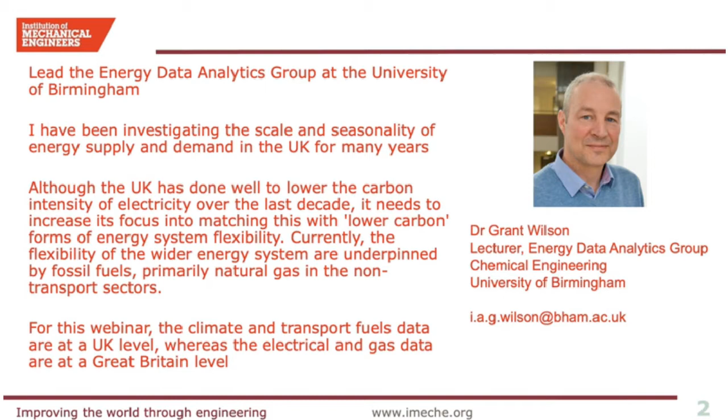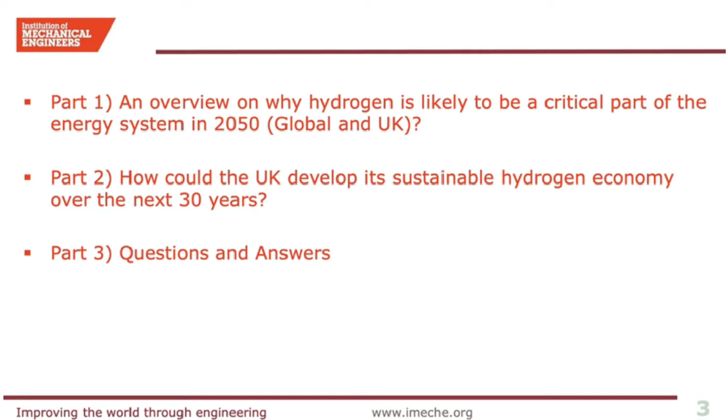There is quite a bit to get through in 40 minutes, so the webinar is split into 3 parts. Part 1 is an overview on why hydrogen is likely to be a critical part of the energy system in 2050 at a global and a UK level. Part 2 is how could the UK develop its sustainable hydrogen economy over the next 30 years. And Part 3, delighted to answer any questions.

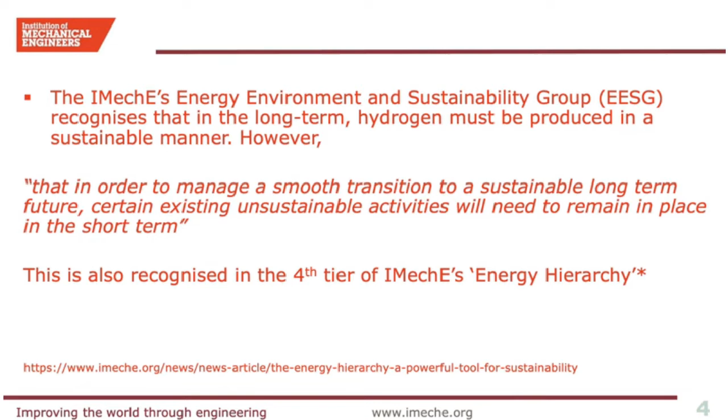It is important to state upfront and clearly that in the view of the Institution of Mechanical Engineers Energy, Environment and Sustainability Group, in the long term, hydrogen must be produced in a sustainable manner. However, the group also recognises that in order to manage a smooth transition to a sustainable long-term future, certain existing unsustainable activities will need to remain in place in the short term. This is also part of the Institution of Mechanical Engineers' energy hierarchy.

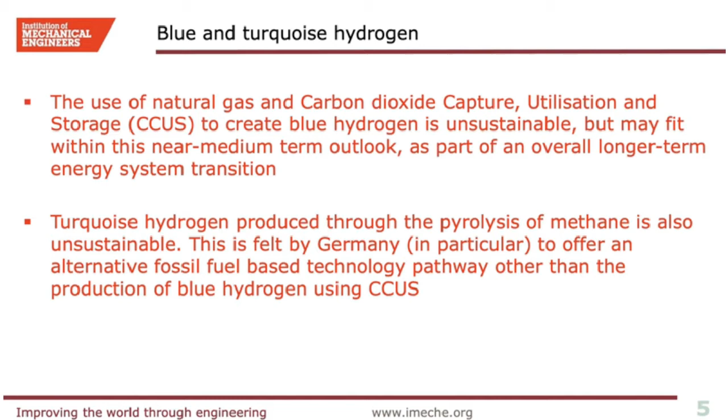The use of natural gas and carbon dioxide capture, utilisation and storage, or CCUS, to create blue hydrogen is unsustainable, but it may fit within this near to medium term outlook as part of an overall longer term energy system transition. Turquoise hydrogen, produced through the pyrolysis of methane, is also unsustainable. It is felt by Germany in particular to offer an alternative fossil fuel based technology pathway other than the production of blue hydrogen using CCUS. However, the production of hydrogen from fossil fuels needs to be replaced as soon as is practical with hydrogen produced from sustainable sources.

Ultimately, hydrogen has to be created from a range of non-fossil, low-carbon sources, such as primary electricity from renewable generation or from bio-based feedstocks. In terms of the cost differential between fossil-produced and sustainably produced hydrogen, governments will continue to have a range of options to encourage a shift from one to the other.

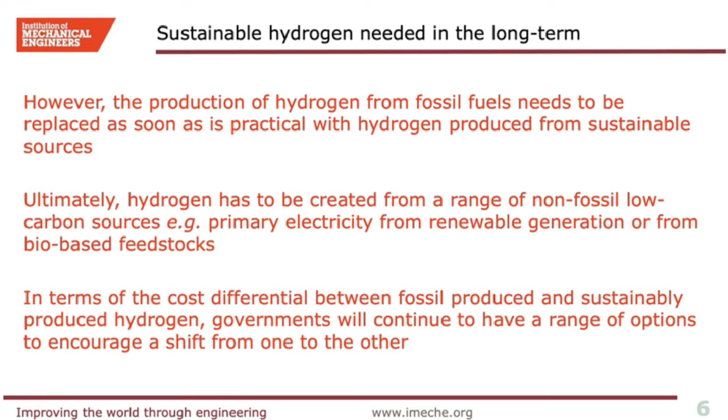Hydrogen is increasingly seen as a critical component of future energy systems. Indeed, in current energy systems, it is already a critical component as a part of fossil hydrocarbons. There's a growing body of evidence suggesting that sustainable hydrogen is likely to be a critical core component of net zero greenhouse gas economies, such as the recent reports and announcements from the European Commission stating that the end goal for the EU is clear: climate neutral energy system integration with renewable hydrogen and renewable electricity at its core.

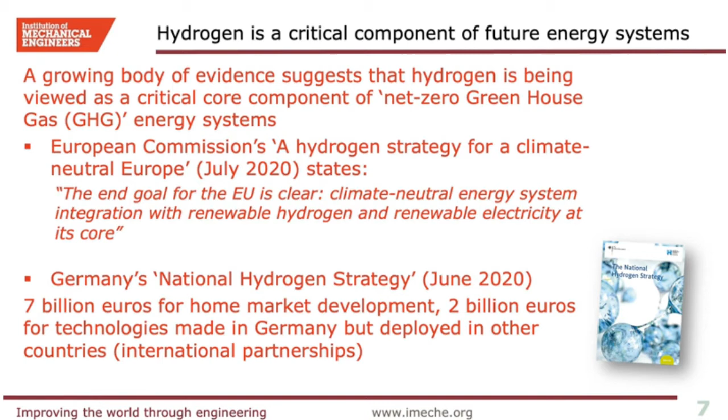This announcement was preceded by Germany's national hydrogen strategy, which announced multi-billion euro support to develop a home market and international market for the development of hydrogen. In the UK, the importance of hydrogen to its net zero ambition is evidenced within the Committee on Climate Change's recent progress report to Parliament, where it is stated that low-carbon hydrogen is critical to achieving net zero and needs to be deployed at scale during the 2020s.

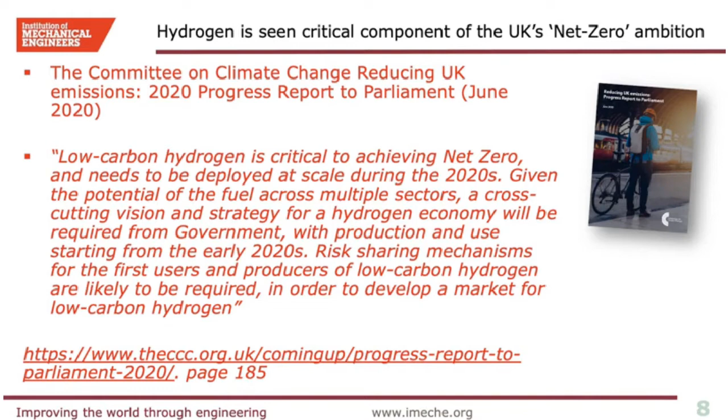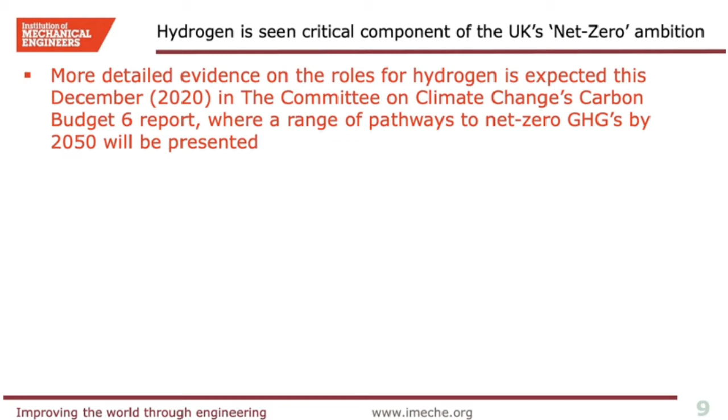Given the potential of the fuel across multiple sectors, a cross-cutting vision and strategy for a hydrogen economy will be required from government, with production and use starting from the early 2020s. Risk-sharing mechanisms for the first users and producers of low-carbon hydrogen are likely to be required in order to develop a market for low-carbon hydrogen. More detailed evidence on the roles for hydrogen is expected this December in the Committee on Climate Change's Carbon Budget 6 report, where a range of pathways to net zero greenhouse gases by 2050 will be presented.

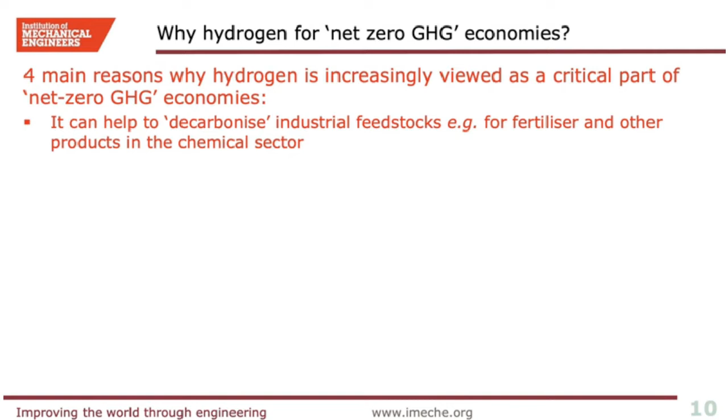So what are the reasons underpinning the growing interest in hydrogen? Why is it being viewed as a critical component of net zero greenhouse gas economies? Firstly, it can help to decarbonise industrial feedstocks, such as for fertiliser and other products in the chemical sector. Secondly, it can provide high temperature process heat, can form the basis of synthetic liquid fuels, and act as a reducing agent for the production of steel.

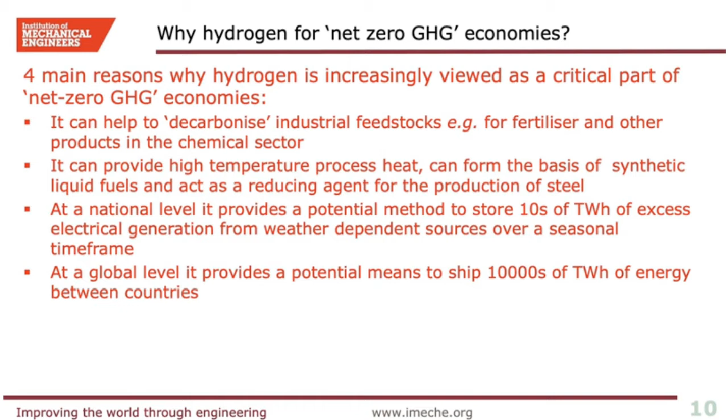Thirdly, at a national level, it provides a potential method to store tens of terawatt hours of excess electrical generation from weather-dependent sources, potentially over seasonal timeframes. And fourthly, at a global level, it provides a potential method to ship tens of thousands of terawatt hours of energy between countries. In essence, hydrogen can help to decarbonise areas of economic activity that have limited other options to do so.

Areas of interest for hydrogen or synthetic fuels using hydrogen in the UK also include forms of transport that are less suited to battery electrification. These include heavy goods vehicles, trains, shipping and aircraft. However, there is great competitive pressure from battery electric vehicles for other areas of transport. Also, given the UK's extensive natural gas network, there is considerable interest in whether these can be repurposed to distribute hydrogen for the provision of space heating and hot water. Again, there is significant competitive pressure from heat pumps of all types, including hybrid heat pumps.

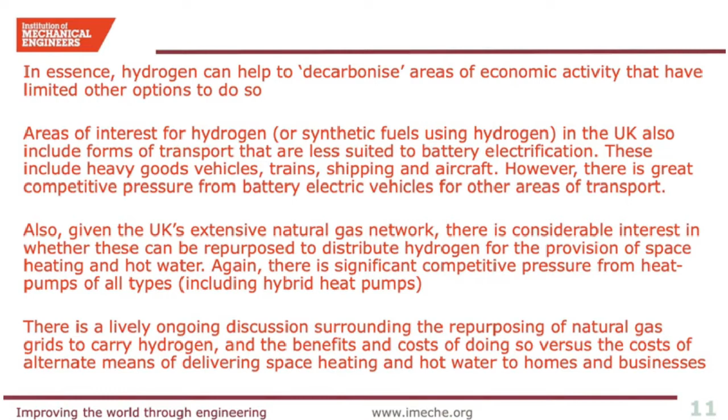There is a lively ongoing discussion surrounding the repurposing of natural gas grids to carry hydrogen and the benefits and costs of doing so versus the cost of alternate means of delivering space heating and hot water to homes and businesses. Given the overview of why hydrogen is likely to be a critical component of future energy systems, the next slides will detail the energy vectors in Great Britain to get a better sense of the scale and seasonality of its existing energy system.

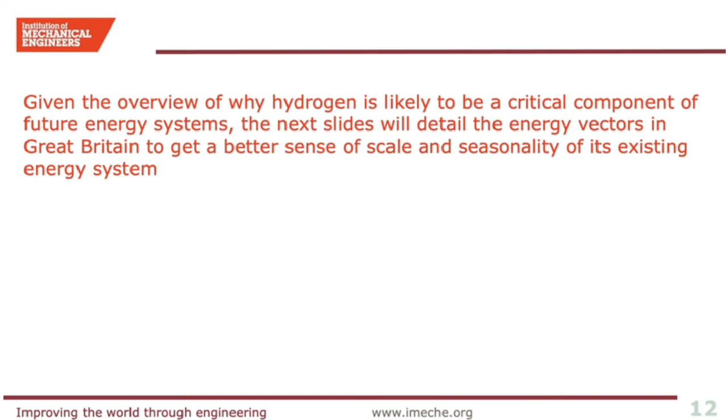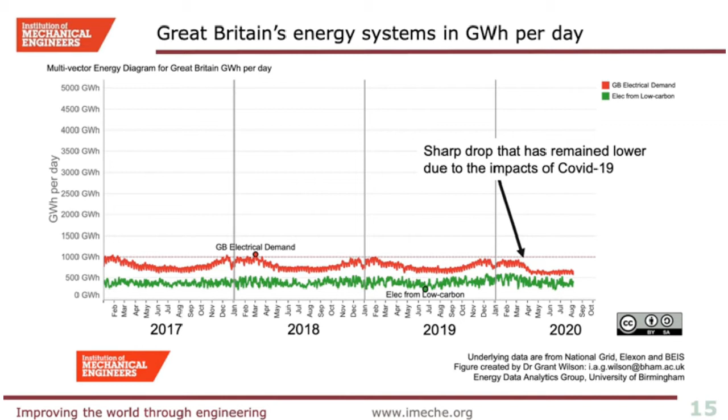We can see the winter peak daily electrical demand is just over 1 terawatt hour per day. The smaller dips show the reduced demand over weekends in comparison to working days of the week. The underlying data shows the sharp drop that has remained lower this year due to the impacts of COVID-19. Using the same time frame and units, we can show other energy vectors to get a better sense of the scale and seasonality of the existing energy system.

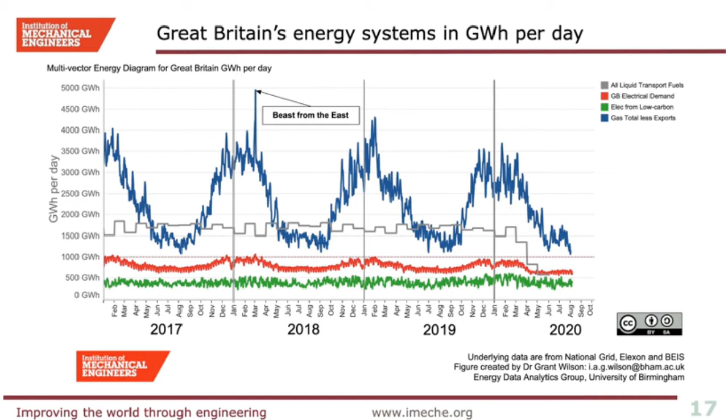In terms of the seasonal and overnight or within-day flexibility of Britain's non-transport energy systems, natural gas currently provides the majority of this flexibility. In essence, natural gas currently underpins the flexibility of Britain's existing energy systems. However, this is neither low carbon nor sustainable.

Although this storage is broadly charged over the summer and discharged over the heating season, the shipment of LNG has disrupted historical patterns of summer and winter price spreads, a factor in the closure of the UK's only seasonal storage facility. The requirement to hold as little as tens of terawatt hours of energy within the UK's boundaries is made feasible by the ability to ship and import terawatt hours of energy into the country.

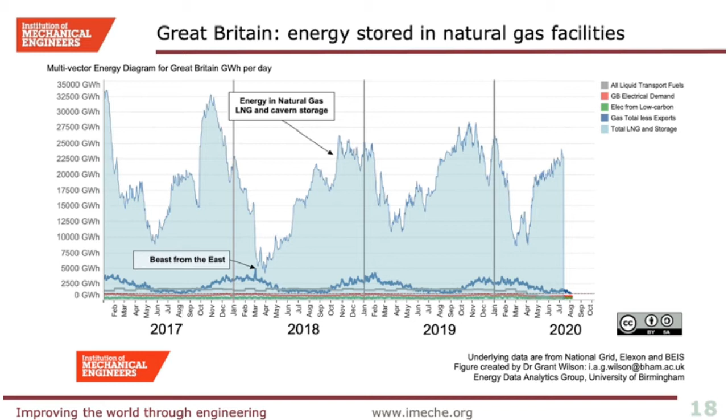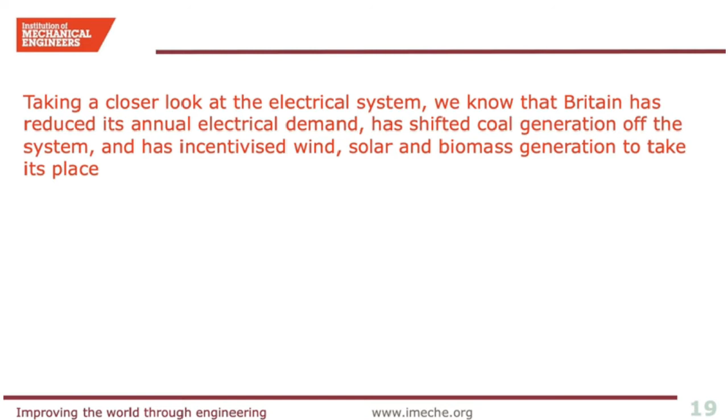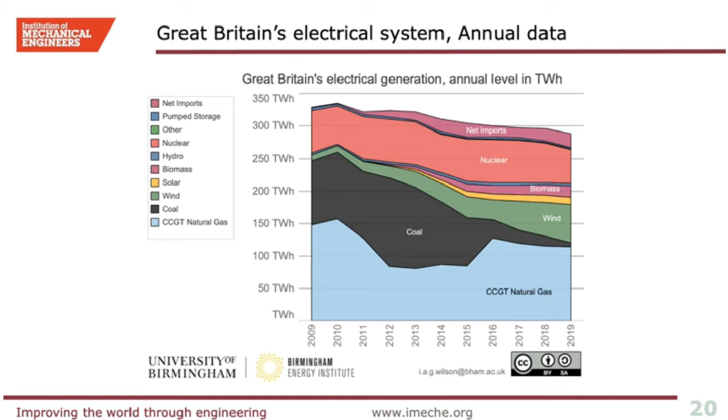Continuing with annual data, but now displaying the data as percentage rather than in absolute energy terms, we can see the growth in renewable generation, particularly wind. Highlighting the percentage of generation from coal and natural gas, i.e. from fossil fuels, we can see a steady decline from 2010. In 2020, helped by the reduction in overall electrical demand from the impacts of COVID-19, fossil fuels generated a third of Britain's electrical energy.

In comparison, highlighting the percentage of generation from weather-dependent renewables, from wind, solar and hydro, we can see the opposite, an increasing trend from 2010. Again, in 2020, influenced by the impacts of COVID-19 on a reduction in overall electrical demand, weather-dependent renewables generated a third of Britain's electrical energy.

Finally, the remaining third of electrical generation in 2020 can be seen to be comprised of nuclear, biomass and imports. Therefore, in 2020, Britain has an electrical generation of a third from fossil fuels, a third from weather-dependent renewables, and a third from nuclear, biomass and imports. Notwithstanding the impacts of COVID-19, this is not something that many observers would have forecast with much certainty, not even 10 years ago, and is a lesson on how rapidly things can change with well-developed policies and incentives.

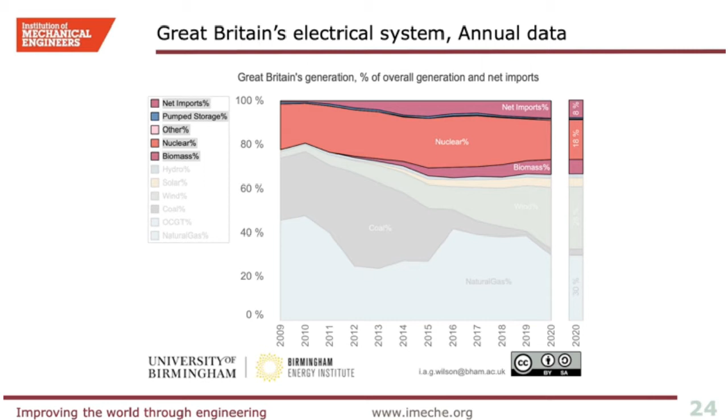However, using values for the full year for 2019, we can see that there are still 120 terawatt hours of fossil fuel generated electricity remaining to be replaced with a lower carbon alternative.

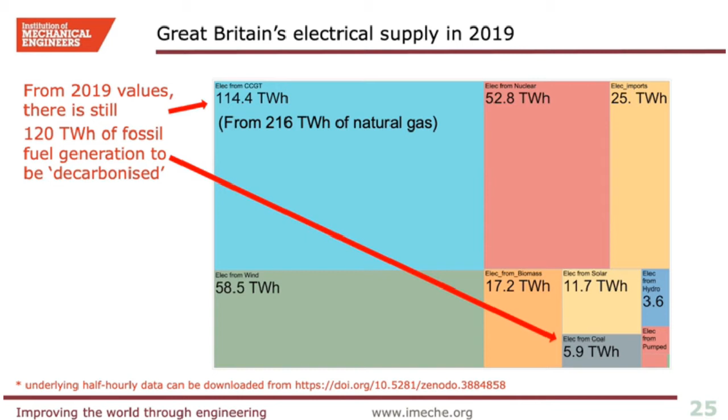Using the historical data, we can see how much additional wind and solar generation is available in comparison to the previous year. Although a rather mixed picture in the early years due to several factors, we can see the average over the recent years has been broadly 10 terawatt hours per year additional generation from a combined total of wind and solar. The reduction in subsidies for solar can be clearly seen in the data for additional generation from solar in 2019 compared to 2018. Although this data is weather dependent and also impacted by curtailment, the supply chain would seem capable of scaling up its output to provide 10 terawatt hours of additional generation per annum.

Of particular note with this chart is the reduction in wind generation in 2016 in comparison to 2015, as 2016 was a less windy year. This is something that energy systems of the future will clearly have to take account of and suggests that a store of tens of terawatt hours of stored energy will continue to be strategically important.

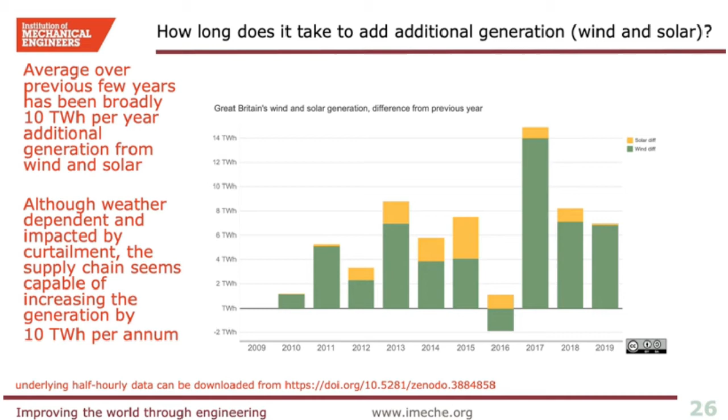This chart shows the running sum over the year for wind generation using half-hourly data. Looking at this data for 2020, the black line, it seems that wind is on track to deliver an additional 10 terawatt hours of additional generation in comparison to 2019. By August 2020, wind generation was 40 terawatt hours from an installed capacity of 24 gigawatts. This is on track to be close to 70 terawatt hours for 2020.

If this was used for sustainable hydrogen production at 70% efficiency, this would equate to 49 terawatt hours of sustainable hydrogen. So, as a sense of scale, all the output of wind in Britain in 2020 could generate nearly 50 terawatt hours of sustainable hydrogen.

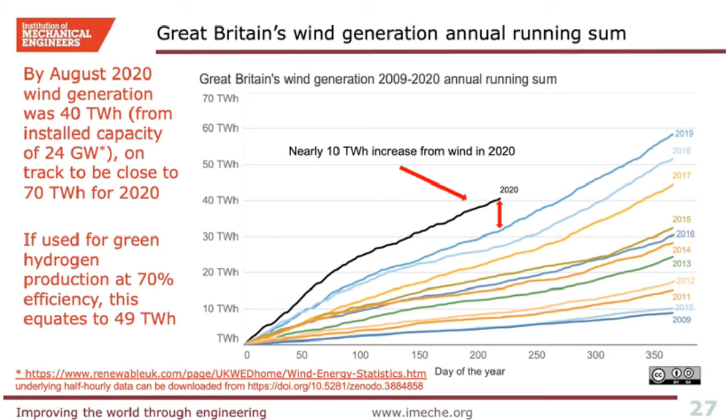If the UK had an additional 10 terawatt hours of electrical generation per year, within the existing energy system in 2020, ignoring supply chain limitations and taking a high-level approach to consider different avenues, if this 10 terawatt hours of additional electricity was used to displace 10 terawatt hours of electrical generation from combined cycle gas turbines, assuming the emission factor for wind is 0 and combined cycle gas turbines is nearly 400 grams of carbon dioxide per kilowatt hour, this would equate to nearly 4 million tonnes of CO2 reduction.

If, however, this 10 terawatt hours of additional electricity was used to create hydrogen at a 70% efficiency, and that is taken from Germany's National Hydrogen Strategy document and may be too high when all losses are considered, assuming this has an emission factor of 180 grams of carbon dioxide per kilowatt hour thermal, this would equate to nearly 1.3 million tonnes of carbon dioxide reduction, if, that is, the natural gas was going to be combusted for space heating or hot water, for example.

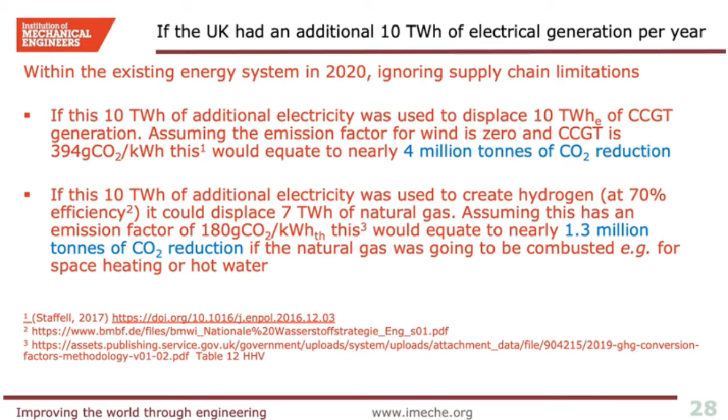If, however, this 10 terawatt hours of additional electricity was used to power electrical heat pumps, to produce space heating and hot water, assuming a seasonal performance factor of 3, then the 10 terawatt-hours electrical energy could displace 30 terawatt-hours of thermal energy of natural gas. This would equate to 5.4 million tonnes of CO2 reduction. There are also potential significant CO2 reduction benefits of using the additional 10 terawatt-hours of electricity to displace petrol and diesel using electric vehicles.

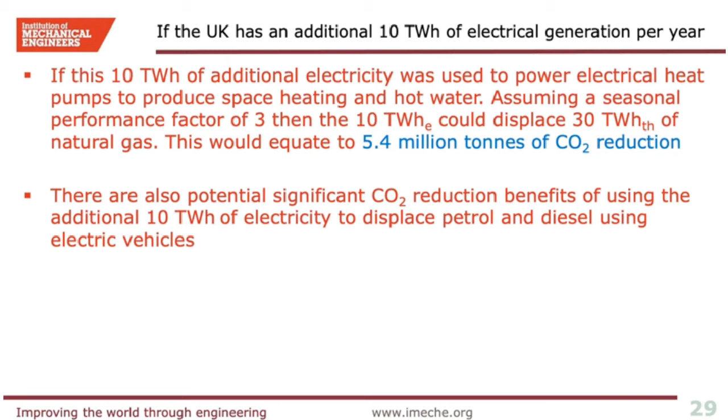From a near to medium term perspective, and accepting there are hard constraints on the amount of additional electrical generation over the next decade, there are logical reasons to question why the UK should seek to develop a sustainable hydrogen supply chain from an emissions reduction perspective. Simply put, there are likely to be greater emissions benefits in the near to medium term to use any additional electricity to decarbonise in other ways than using it for sustainable hydrogen production.

However, if one accepts that hydrogen will be a critical component in future energy systems, including the UK energy system, and that hydrogen from any fossil source is unsustainable, then it follows that a sustainable hydrogen supply chain of significant scale would need to be developed. This could be left to other countries to develop, but there are a range of benefits to the UK to develop an indigenous supply chain.

The balancing of tens of terawatt-hours of otherwise curtailed electrical generation from over 100 gigawatts of installed renewable generation capacity likely to be deployed in the UK in future should be a significant driver in the development of a sustainable hydrogen supply chain. The challenge the UK has, similar to other countries such as Germany, is to develop a sustainable hydrogen supply chain so that it can replace fossil-based hydrogen over an appropriately rapid timeframe.

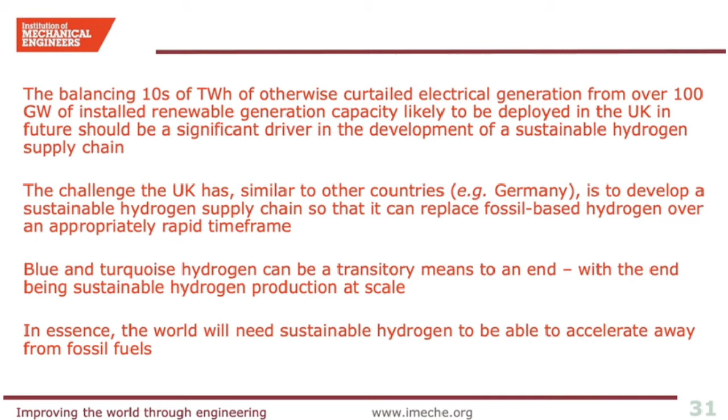Blue and turquoise hydrogen can be a transitory means to an end, with the end being sustainable hydrogen production at scale. In essence, the world will need sustainable hydrogen to be able to accelerate away from fossil fuels. This opinion is based on some assumed trends in global energy out to 2050 and beyond. These are: energy systems around the world will continue to decarbonise, but the pace of this will continue to be unique to each country. Countries will continue to exploit their indigenous energy resources.

Renewable resources, particularly renewable electricity, will continue to gain primary energy market share. Countries will seek to reduce energy demand and become more energy efficient as a means to limit their import dependency and maximise the use of their indigenous primary energy sources. And embedded carbon in goods and services will start to attract meaningful tariffs at import boundaries as trade areas seek to limit the risk of carbon leakage and develop comparative carbon advantages.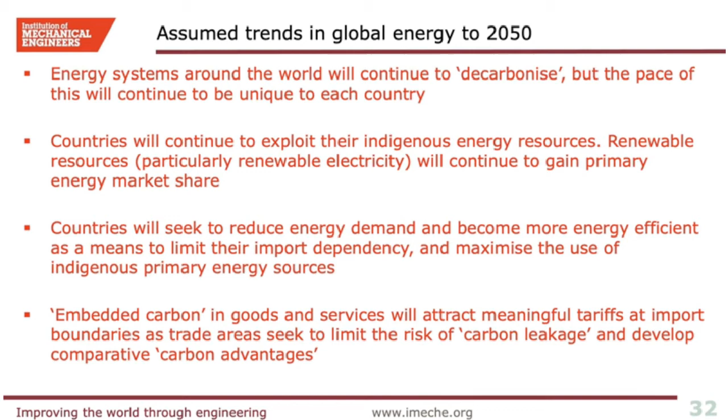There will continue to be energy exporting countries and energy importing countries underpinning the need for seaborne energy transit at a scale of tens of thousands of terawatt hours per year, i.e. greater than 10,000 ship journeys per year, each delivering greater than 1 terawatt hour of energy.

Stored energy in a fuel will continue to be the main method of shipping energy around the world due to the comparative advantages of energy density and the power rates for loading and offloading the energy from the ship. It is difficult to see electrochemical and thermal energy storage displacing fuels as the mainstay of energy shipped between nations.

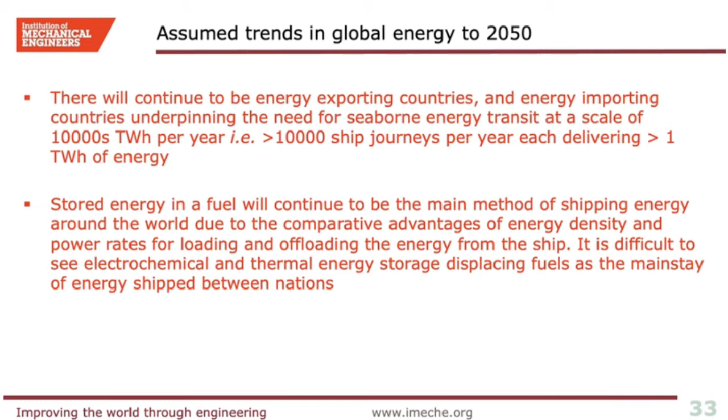Hydrogen has had levels of interest before, so what is different now? Since previous cycles of interest, international climate ambitions have markedly increased, such as the Paris Agreement. For the UK in particular, the biggest difference is the net zero greenhouse gas target by 2050 that was enacted in 2019. This means that all sectors, industry, agriculture, transport and households have to play a full part.

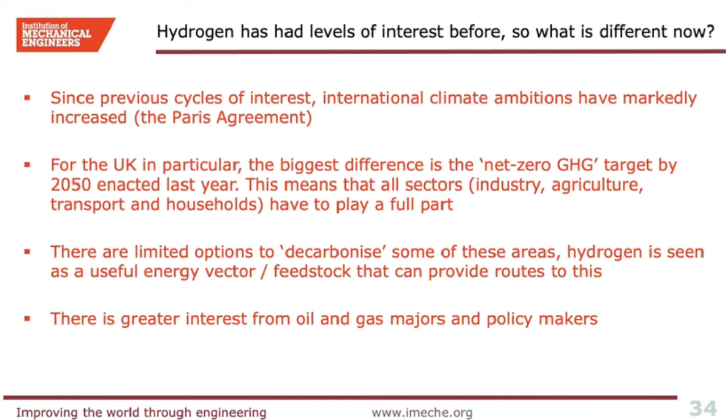There are limited options to decarbonise some of these areas. Hydrogen is seen as a useful energy vector and feedstock that can provide routes to do this. Also, there is a greater interest from oil and gas majors and policymakers too.

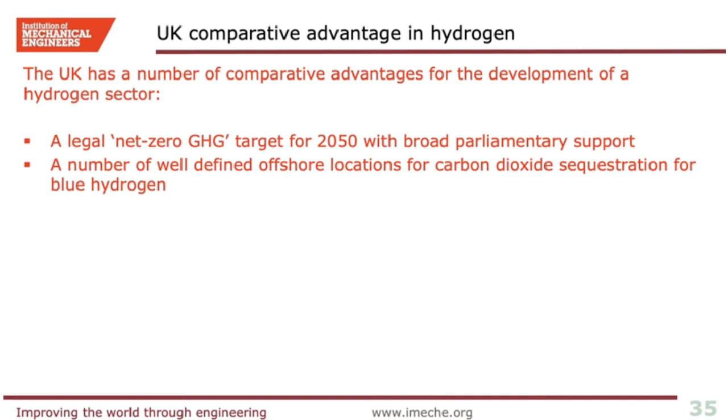The UK has a number of comparative advantages for the development of a hydrogen sector, not least a legal net zero greenhouse gas target for 2050 with broad parliamentary support. It has a number of well-defined offshore locations for carbon dioxide sequestration for blue hydrogen. It has reasonably well co-located industrial clusters with these offshore carbon dioxide locations, helpful for capturing industrial emissions into a developed CCUS infrastructure. It has a vibrant hydrogen innovation landscape, currently investigating the challenges of hydrogen infrastructure and delivery.

It has a world-class academic and private sector research base, significant energy companies, energy and engineering consultancies, finance sector and legal and insurance sectors, and it has a significant offshore wind resource. These are comparative advantages that many other countries in the world would perhaps like to have the option of exploiting.

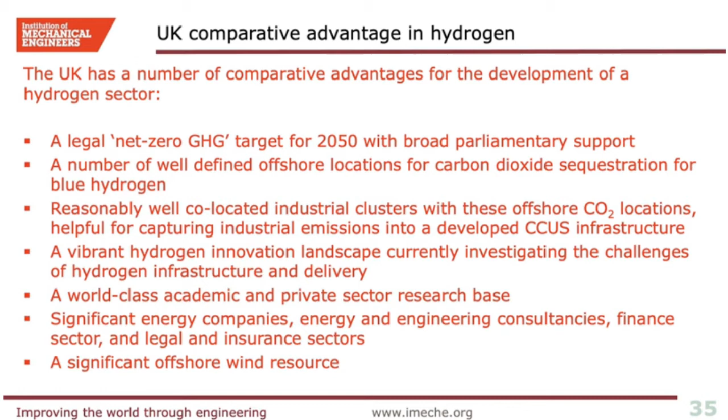Another area that the UK may wish to consider in terms of these comparative advantages is that other areas of the world have signalled their intention to develop supply chains. Regardless of the amount of innovation and deployment in the UK of hydrogen technologies and infrastructure, other areas of the world seem interested in taking advantage of these opportunities afforded by a growing hydrogen sector.

Europe, Germany in particular, Japan, South Korea and China each have advantages to develop supply chains. A coordinated approach in the UK would provide the best chance of its success to position the UK as one of the best places internationally to develop and deploy sustainable hydrogen technologies.

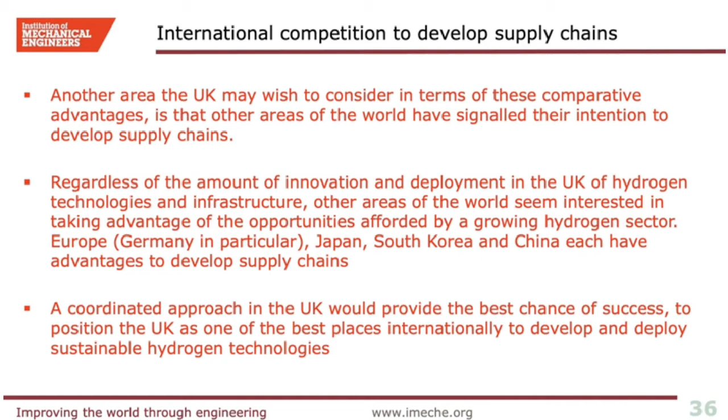So if the UK is to develop a hydrogen supply chain, the top three recommendations would be, firstly, to develop a clear, coherent hydrogen strategy for the UK. Secondly, the coordination of hydrogen sector innovation, deployment and development across industry, government and academia. And thirdly, to support initial markets to develop for both sustainable hydrogen and fossil-based hydrogen.

A hydrogen strategy is urgently needed to map a clear, coherent and coordinated pathway to an eventual supply chain delivering tens and perhaps hundreds of terawatt hours of sustainable hydrogen each year. This would deliver a sustainable feedstock for industry for commodity products, fertilizers and chemical feedstocks, and fuels for areas that are less or unsuitable for electrification. To reiterate, sustainable hydrogen must eventually displace hydrogen derived from fossil sources.

A major element of this should be an industrial strategy to increase industrial opportunities both nationally and internationally for UK-based manufacturing, and to help to decarbonise existing industry and agriculture. This strategy would accommodate a twin-track approach to the development of hydrogen from fossil fuels and from sustainable sources, with a long-term aim that fossil sources are displaced by sustainable hydrogen.

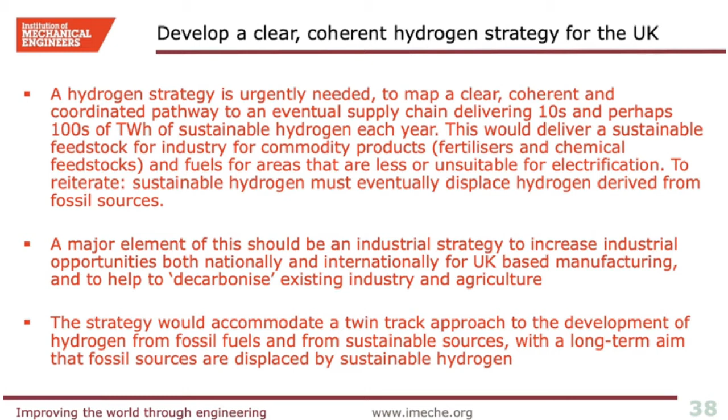The second recommendation is the coordination of hydrogen sector innovation. There have been some successful pathways of innovation in the energy space over recent years in the UK, notably innovation in the offshore wind sector. Government should assess what worked and equally what did not, and consider how learning could be leveraged across into hydrogen.

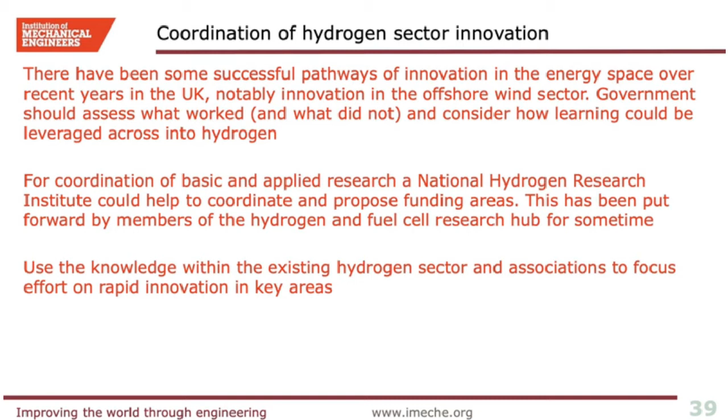For coordination of basic and applied research, a National Hydrogen Research Institute could help to coordinate and propose funding areas. This has been put forward by members of the Hydrogen and Fuel Cell Research Hub for some time. Also, use the knowledge within the existing hydrogen sector and associations to focus effort on rapid innovation in key areas.

The third recommendation was to support initial markets to develop for both sustainable hydrogen and fossil-based hydrogen. So let us consider the annual data for existing natural gas markets in the UK.

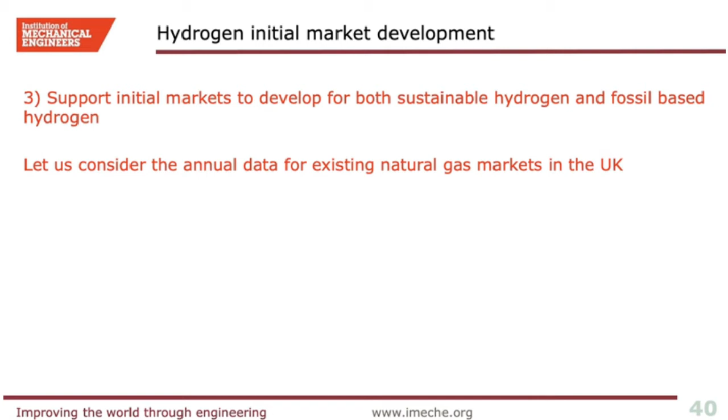This chart shows the annual values of different natural gas markets from 2011 to 2019. The largest in this chart is called gas non-daily metered, and is the fraction of natural gas delivered through local gas networks that is not metered on a daily basis, that is, before the rollout of smart meters. Demand from homes, smaller industry and commerce are all within this fraction, and as a reminder, it is this that drives the largest seasonal swing in energy demand in the UK across the whole energy system.

Gas daily metered is also delivered through local gas networks, but is large enough to warrant a meter that provides the gas distribution network operator with at least a daily reading. Gas to industry, gas to power stations, and gas to storage injection are all self-explanatory fractions.

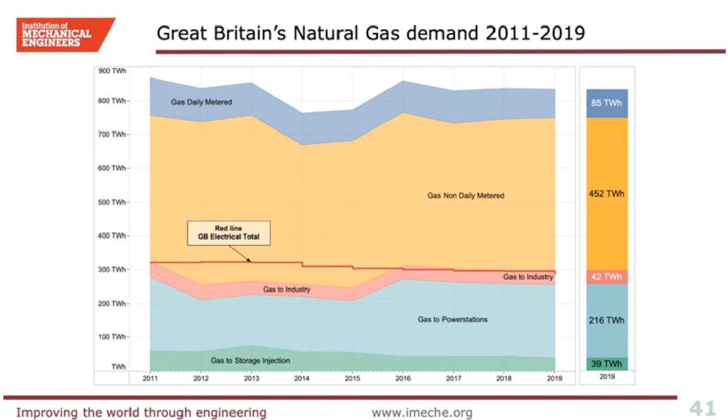This chart shows the values for 2019 in a different format to provide an easier sense of scale. From the earlier slide that presented the running sum of wind generation for each year, we can see that the wind generation for 2019 was nearly 60 terawatt hours of electrical energy. At an assumed efficiency of 70%, the output of all wind generation in 2019 would therefore produce 42 terawatt hours of sustainable hydrogen. Interestingly, a similar level in energy terms to the amount of natural gas for industry connected to the transmission system in 2019.

Although the breakdown between feedstock and natural gas for combustion in industry was not found, this high-level comparison again provides a sense of scale.

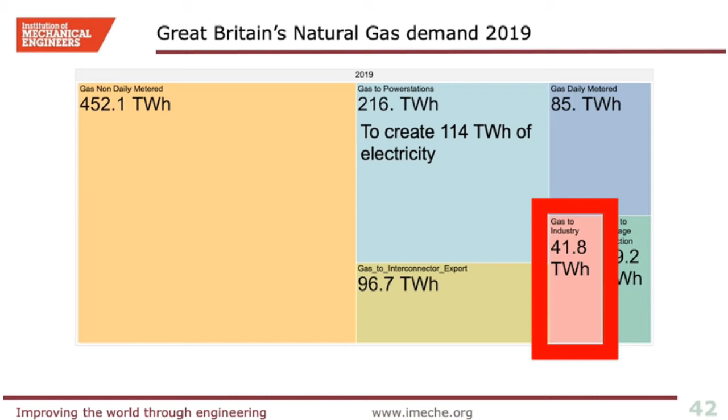This slide disaggregates the previous 41.8 terawatt hours of total industrial demand of natural gas in 2019 into the different industrial locations. Using the value of 24 gigawatts of installed wind capacity on the UK system from Renewable UK's website, and also forecasting this will output close to 70 terawatt hours of electricity in 2020, coupling this to an assumed 70% efficiency value for sustainable hydrogen production gives an approximate value of 2 terawatt hours of sustainable hydrogen for every gigawatt of installed wind. This is a mixture of current onshore, offshore, and with curtailment.

The values of additional wind capacity are written below the 2019 values for natural gas demand, and this also provides a sense of scale of the capacity of wind generation needed to create the levels of sustainable hydrogen for these industrial areas.

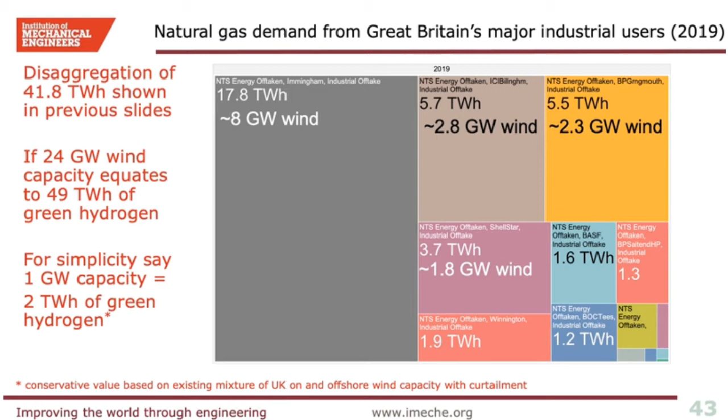So following on from these slides to present a sense of scale, back to some ideas for initial market development. Accelerating innovation is a key consideration. Initial market development could be through shorter-lived subsidies for the production of sustainable hydrogen. Keeping this open could allow firms to decide which initial markets to target. The aim is to create a virtuous cycle of learning and product innovation and deployment through a significant scaling up of the UK market for sustainable hydrogen, not just electrolyzers, but also from bio-based routes.

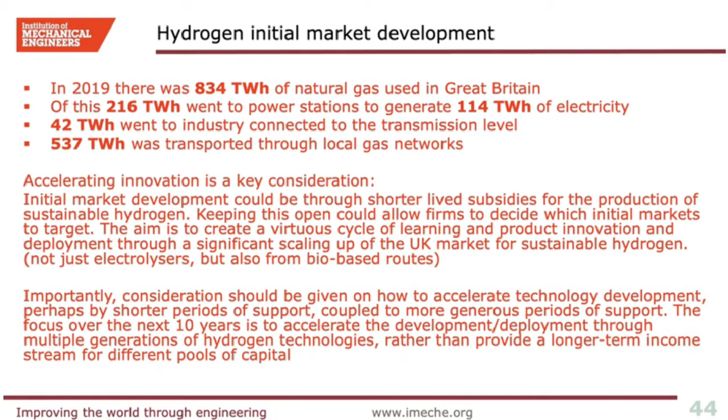Importantly, consideration should be given on how to accelerate this technology development, perhaps by shorter periods of support coupled to more generous periods of support. The focus over the next 10 years is therefore to accelerate the development and deployment through multiple generations of hydrogen technologies, rather than providing a longer-term income stream for different pools of capital.

UK policy has experience of multiple forms of subsidy, such as renewable obligations, feed-in tariffs, and contracts for difference. All have advantages and disadvantages, so no implicit recommendation is made here, other than focusing hydrogen subsidies over shortened timeframes to encourage multiple generations of innovation rather than longer-term investment stability. Longer-term investment stability would eventually happen on the back of the accelerated cycles of innovation.

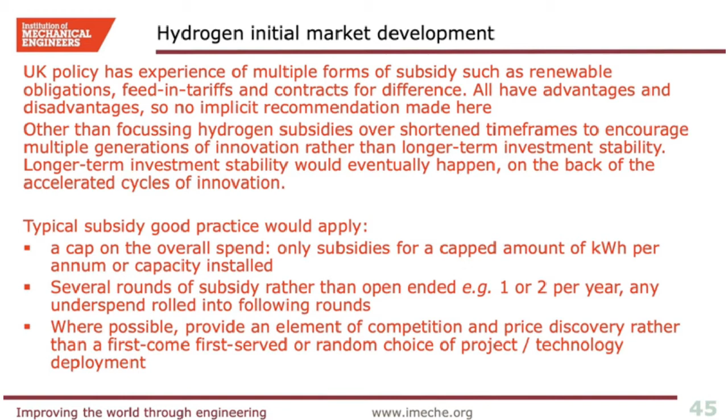Typical subsidy good practice would apply. A cap on the overall spend, only subsidies for a capped amount of kilowatt hours per annum or capacity installed. Several rounds of subsidy rather than open-ended, such as 1 or 2 per year, and any underspend rolled into following rounds, and where possible provide an element of competition and price discovery rather than a first-come, first-served or random choice of project or technology deployment.

The development of a virtual hydrogen market could open up end-use areas initially better suited to incorporate sustainable hydrogen. If sustainable hydrogen obligations were placed on the most liquid markets for natural gas, potentially driven by a sustainable hydrogen obligation on shippers or suppliers, then a nascent hydrogen certificate market could develop. This would allow learning across the sector in preparation of an eventual market for hydrogen itself, both blue and sustainable, and encourage greater numbers of counterparties to take part in a developing market.

For example, 1% of all the 537 terawatt hours of gas that was delivered through Britain's local gas systems in 2019 would equate to 5.4 terawatt hours. This would be a significant virtual market for sustainable hydrogen to be able to target.

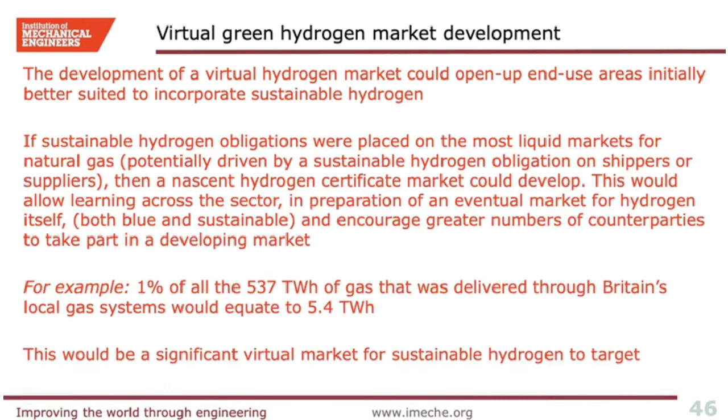Using a virtual hydrogen market, it might not matter which end use the hydrogen was created for, merely that the hydrogen was created. This could allow sustainable hydrogen obligation certificates to be traded and a wider market knowledge to develop. It might also allow the market the flexibility to decide where to innovate and deploy generations of technologies and provide the scale needed to drive learning rates through the supply chain. The ultimate aim is to drive technology and installation costs down through innovation and learning rates, and for this to happen, the sector needs appropriate markets to target.

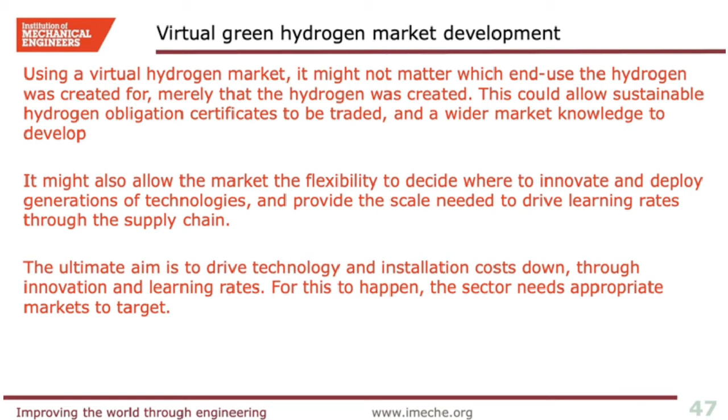As with any other energy vector or technology, hydrogen, blue or sustainable, is not a panacea for greenhouse gas reduction. Nonetheless, hydrogen is increasingly viewed as a critical component of sustainable energy systems at a global and a local level. And to be able to shift away from fossil fuels, the world is likely to need sustainable hydrogen to provide the basis for a store of energy, either itself or as part of other synthetic fuels.

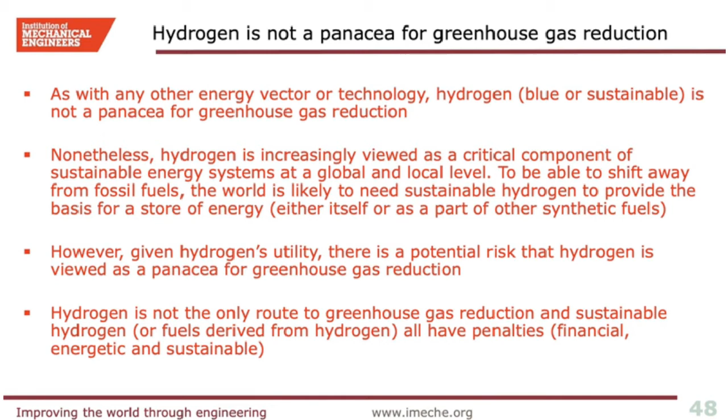However, given hydrogen's utility, there is a potential risk that hydrogen is viewed as a panacea for greenhouse gas reduction. Hydrogen is not the only route to greenhouse gas reduction, and sustainable hydrogen, or fuels derived from that, all have penalties: financial, energetic, and sustainable. For every end-use case, we should therefore continue to ask, is it feasible to use the electricity directly, i.e. without the need to transform the electricity into hydrogen?

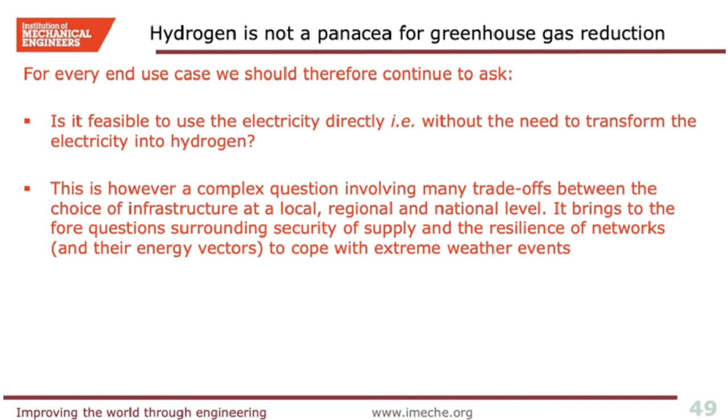This is, however, a complex question involving many trade-offs between the choice of infrastructure at a local, regional, and national level. It brings to the fore questions surrounding security of supply and the resilience of networks and their energy vectors to cope with extreme weather events. However, if we do not develop a supply chain for hydrogen in the areas that it is well suited, the question does arise as to what could be used instead.

We need to develop a sustainable hydrogen supply chain precisely to substitute for fossil fuel-based hydrogen, and as experience has shown in renewable generation technologies, impressive cost reductions are possible through learning rates and innovation, but these take time. The UK has a number of challenges that hydrogen can help to solve, and it has a number of comparative advantages to the development of a hydrogen supply chain.